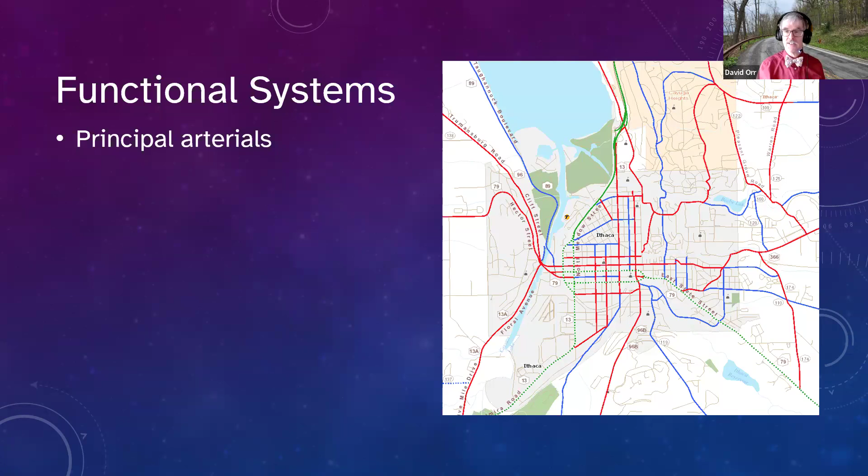So there are principal arterials. These are the main, most important roadways. The interstate system obviously is principal arterials, but every community has certain roads that are the most critical roadways. These are the main lifeblood of the commerce within our community. There'll be minor arterials, maybe not as critical, but they'll still be pretty important to getting people from point A to point B. And the primary focus on most arterials is movement. Movement and safety, those are the primary two things.

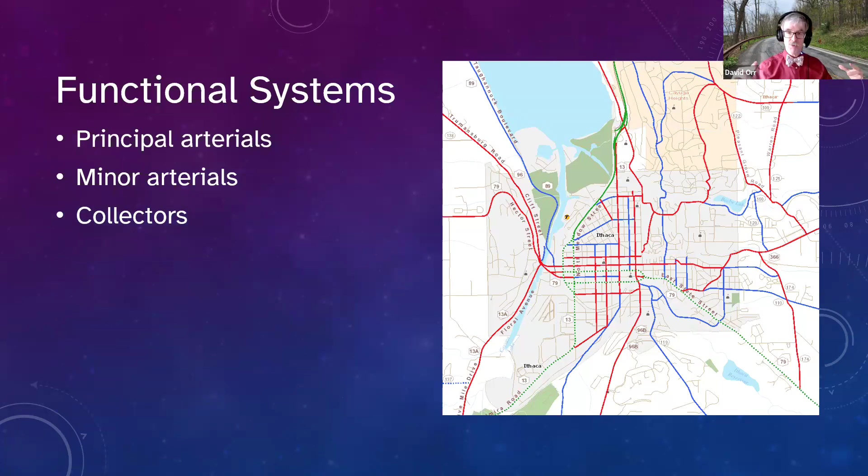And there can be a conflict because the second tier of roads, where we collect the traffic from the local system, sometimes almost acts like an arterial. And of course, the local roads is where we live and work and go to school. There definitely can be a conflict where we've got a road that's trying to serve multiple functions at the same time, because while the arterial's primary job is movement, the local's primary job is access. And speeds typically are lower and volumes are typically lower, but when you get a high volume local road that acts like an arterial, it can create a conflict.

I mean, we like to joke and say that everybody starts and finishes every trip, and it's not really a joke, it's true. They start and end a trip on a local road. Where they live is a local road, even if it's classified as an arterial or a collector. If people could do so, they would put a driveway on the thruway. And then they'd complain, of course, the next day because people were speeding in front of their house. But that's a reality we have to deal with.

Now, if you're interested in knowing what the classification is for your system, you can go online and just type in functional classification, New York State DOT, and up will pop the New York State DOT functional classification viewer, and you can actually get a sense of what the federal and state governments are classifying the roads for. And by the way, there's some funding that's available for the arterials and collectors.

Now, you could also look at very low volume road functional classifications. In this particular case, this is a standard that is now actually supported by AASHTO. And for low volume, under 400, some people say under 2,000, we'll argue about that particular number. But the idea is you use land classification to decide the purpose of the roadway. So is it residential? Is it commercial? Is it agricultural? And that can be very helpful when it comes to trying to figure out your priorities and where you're going to spend your money.

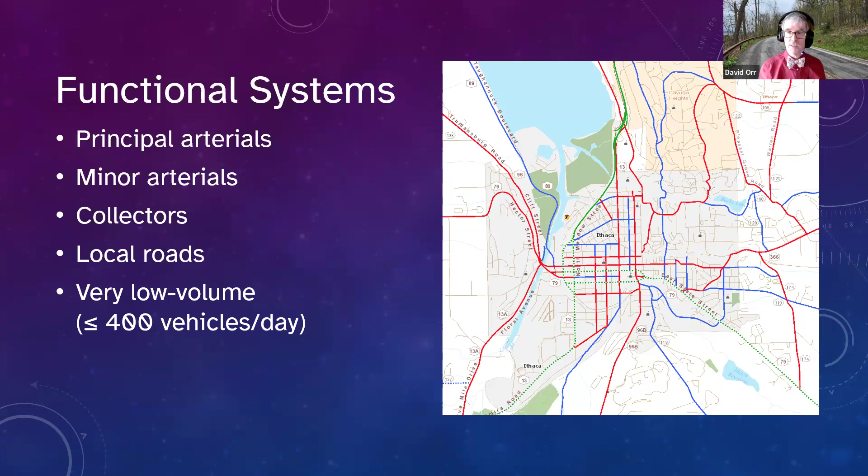Now, one of the more critical things we need to know is traffic. And traffic volume, you can put out counters and tubes, and they have ones that are visual these days. All kind of fancy ways to estimate traffic. But I got a couple of rules that actually work pretty well and can be used to check to make sure your tools are working right.

So let's look at a rural area. The busiest time of day typically is everybody going to work in the morning or everybody coming home from school and work in the afternoon. And it might be different in your community. More commonly, it's in the afternoon because everybody wants to get home from work. But in a lot of communities, it can be in the morning because everybody's due at a particular plant or all the government offices open at a certain time. You probably know when that is in your area.

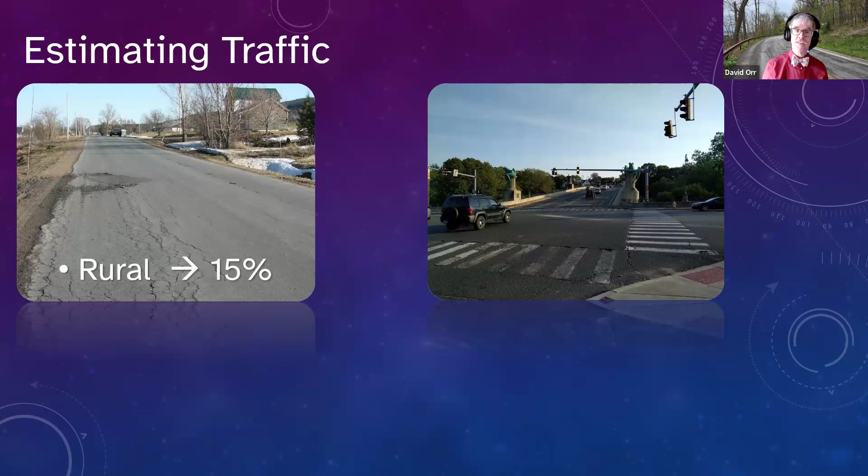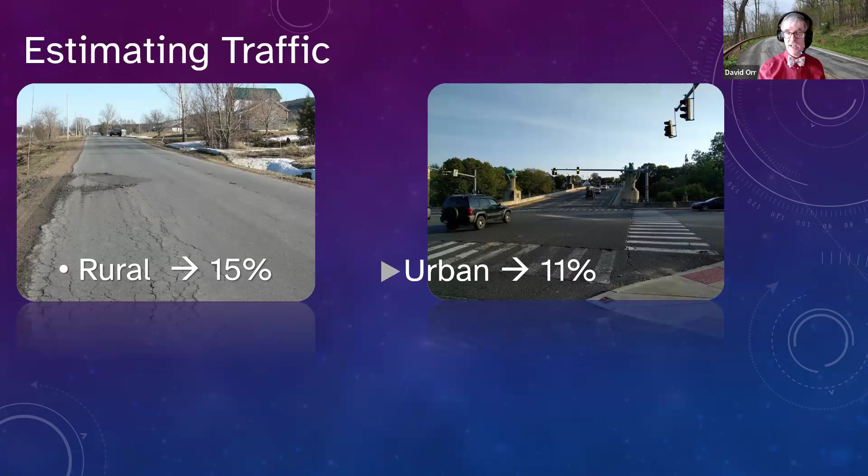During that busiest hour of the day, in a rural area, you're going to get about 15% of the traffic. In an urban area, it's about 11% of the traffic. So a little bit less. There's not as much of a peak with the morning and afternoon commutes, surprisingly. But if you want to know traffic then, you could go out for 15 minutes, multiply that value by 4 to get an hour count, and divide it by that percentage. And that would give you an estimate of the traffic.

You could also figure out a factor, an F factor if you wanted to, and again, rounded, you could take the count for 15 minutes and multiply it by 27. That gives you your rural count. You could take the count in an urban area and multiply it by 36. That would give you your urban count. What does this mean practically?

Well, in a rural area, if you think about it, if you had one vehicle per minute, that would be about 400 vehicles per day, which is that cutoff point we talked about that a lot of people think of as very low volume. So 400 vehicles a day. In an urban area, it of course would be a little bit larger, okay? So if you had one vehicle a minute, you'd have about 600 vehicles a day. And of course, in suburban areas, it's going to be between the two.

Surprisingly, this is pretty accurate, within 5 or 10%. And if you put out a counter and you see a really low number or a really large number compared to what your 15-minute count tells you, maybe something's wrong with the tubes or the counter. And it's a quick way to check before you spend the money and the time on the fancy tools. And it's a good way to estimate traffic.

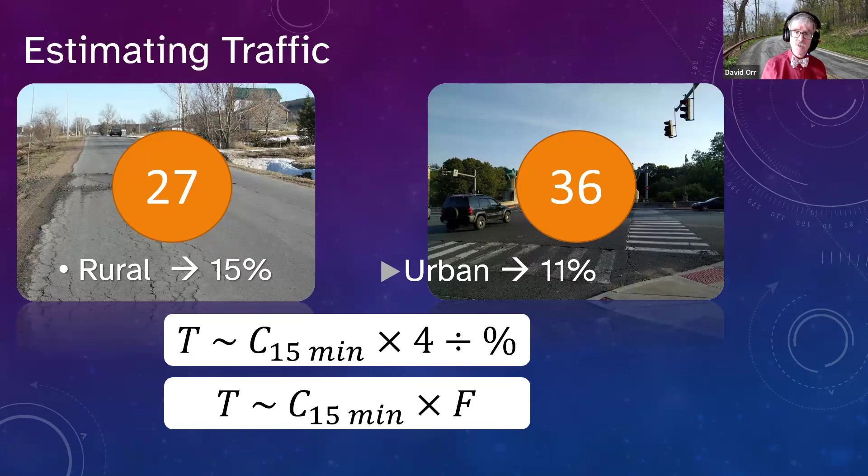Now, in terms of what this means practically is, our functional classifications, those arterials take more traffic volume, even though they're a relatively small portion of our overall network. Okay? So look at the principal arterials. These are the interstates, the national highway system. It, depending on the state, can be from 40 to 65% of the total traffic volume. It's only 5 to 10% of the length. And especially in rural areas, the traffic volumes are much higher on the arterials compared to the lengths.

And again, in the local system, it may only carry 10 to 30% of the traffic volume, but in terms of centerline mileage, it's 65 to 80%. And when we're trying to manage that, trying to budget for that, that can be a bit of a challenge for us because obviously, everything gets paid for directly or indirectly with taxes, and there's just a limited amount of funds.

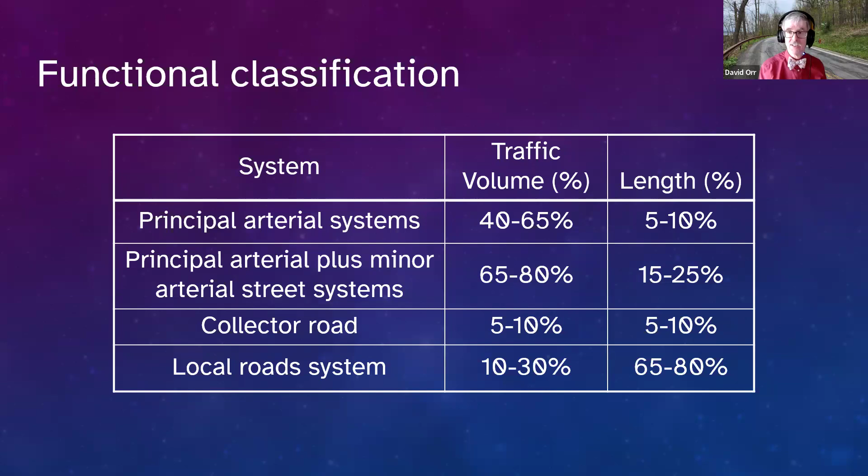Now, in terms of goods transported by truck, the percentage has varied some from one year to the next, but on average, it's about 70% of all goods are on a truck at some point during their delivery cycle. They may be brought in by ship to the United States, they may be sent by pipeline, but at some point the gasoline is put into a truck and taken to the gas station. The microwave that was shipped overseas is put on a train, but then put on a truck to be dropped off at the local Walmart or Kmart or store that you're going to buy it from. So the idea is most goods transported by truck.

One thing you may want to do, especially if you work on the government side, is go back and look at those classifications. They haven't been updated in a lot of cases, and maybe it's time to think about that. If you've got a road that really is acting more like an arterial, you might want to get it on the list, and vice versa. You may have a road that's really more local. It does change funding, both for good and for bad. You really want to have it in the right spot because if you're not a federal aid road, you may not be eligible for certain kinds of emergency relief, for instance. So something to keep in mind.

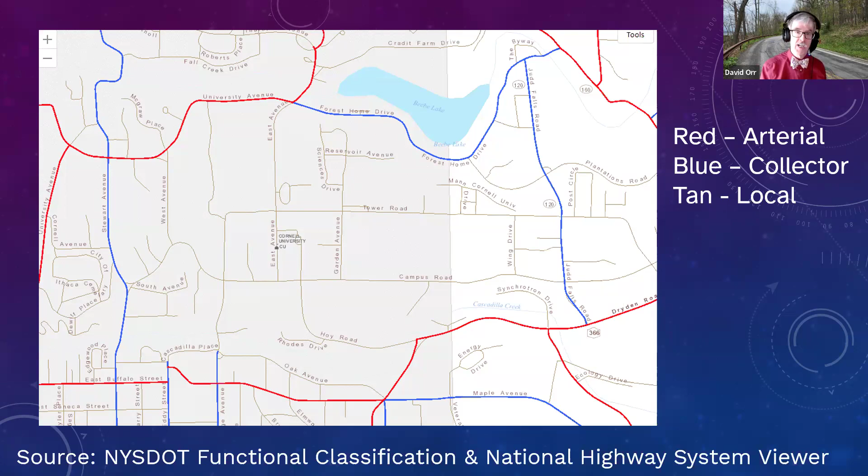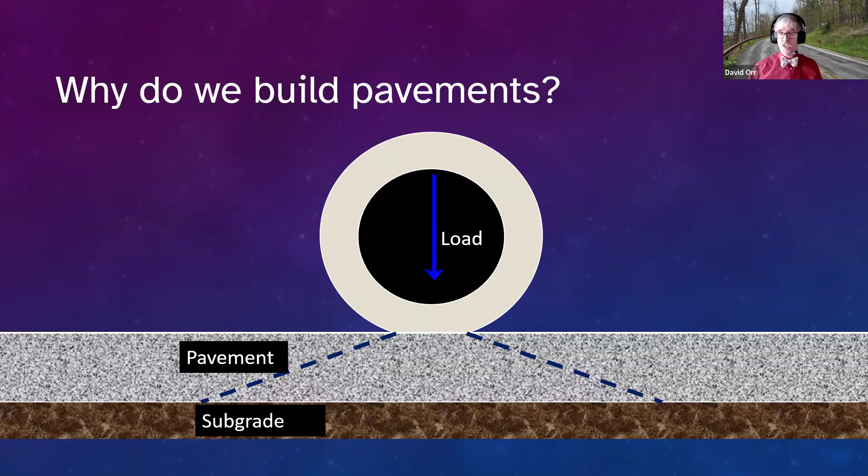But if you got a road that does this to you, you probably got a base problem or you've got a problem with water. So think about that when you're trying to think about making sure your road has enough thickness, has enough structure. And think about the critical locations on the pavement, okay? You're going to have critical places where there's going to be damage right underneath the wheel due to cracking, due to the fact that there is the high pressure tire causing cracking going on.

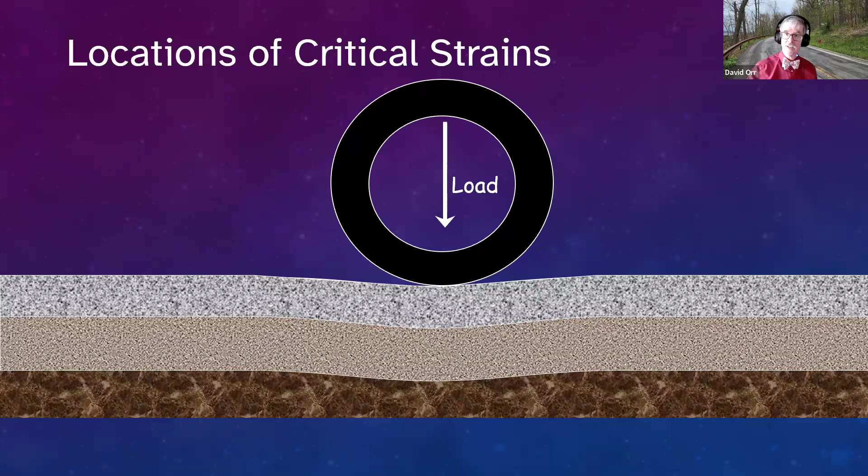You're also going to have a more critical problem on the top of the subgrade. You don't want to overstress the subgrade. That's going to lead to rutting, and rutting is bad as well. So keep that in mind. And we can do, and we have done, whole webinars and classes on designing the pavement, but build the road to handle the load. Now, what does this mean in terms of the roadway itself?

Well, what I'm really caring about is the damage of a truck versus the damage of a car. A truck weighs about 10 times more than a car, a fully loaded dump truck, but it doesn't just do 10 times more the damage. It does about 4,000 to 6,000 times the damage. If I had a fully loaded dump truck and I had a whole bunch of cars, it would take about 4,000 passes of the cars to equal one pass of a truck.

And especially if you got a fairly low volume of traffic, you got a pretty high percentage of trucks. So the thickness of your road, you're driving it by the number of trucks. Okay? In terms of geometry, which we'll talk about in a little bit, that's usually driven by radius for trucks, but the number of cars and how the cars are getting around. So we have to balance these two things. And of course, at the wrong time of year, even a few truck passes can do even more damage if the roadway's in thawing conditions and it's weak.

Now, I'm not talking about something like this where you've got a single supersized load that is putting a lot of weight onto a roadway. Something like this is the digester in Iowa. You're going to have to design this particular one very specifically, okay? That's a one-off. Normally, we try to build the road to handle the loads, and we have certain minimums that we might want to put in.

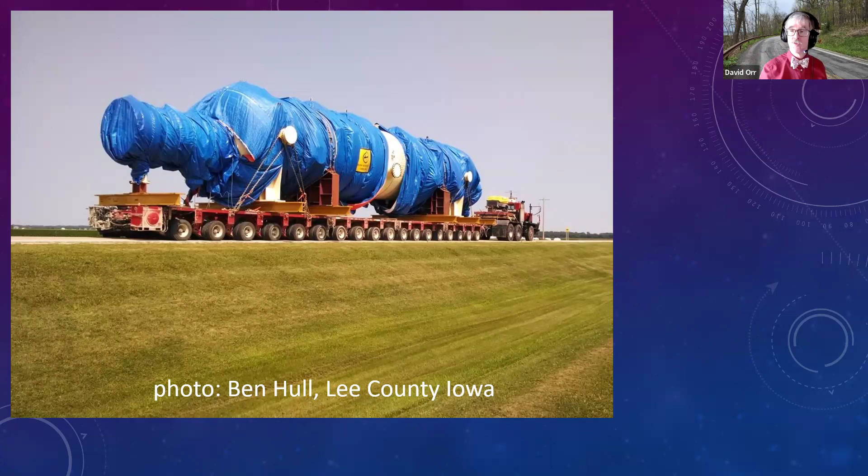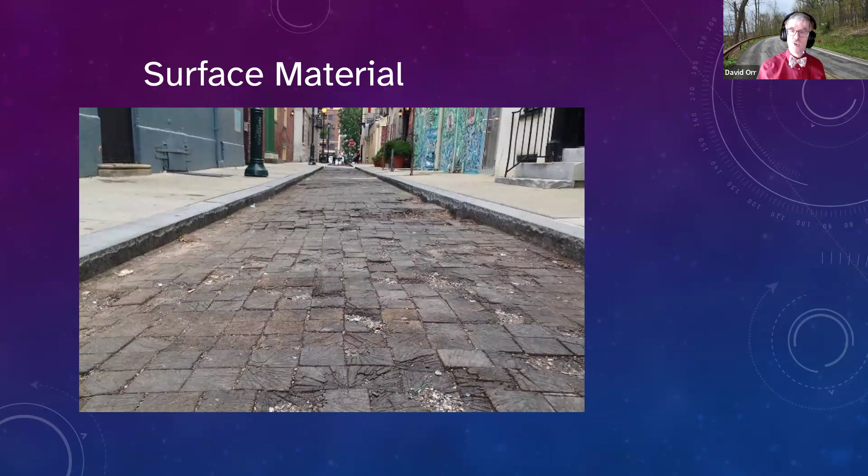And as part of that, we care about the surface material that we have for the roadway. Now, this happens to be a wooden street in Philadelphia, okay? It's actually wood blocks that have been placed and put in place and chinked in Philadelphia. But what other surface materials do we actually use on our roadway? What kind of surface materials? Let's see what y'all come up with. Concrete surfaces, brick. I got someone put stone over onto the left. Mm-hmm. Asphalt, gravel, cobbles. Yeah.

Surprisingly, across the entire United States, gravel is still the most common surface type. Okay. In fact, we're actually depaving some roadways. We're taking them from asphalt back to gravel. Second by far is asphalt. Some people call that blacktop. Some people call that bituminous pavement.

Different words are used, but essentially, what is the binding agent? What holds the materials together on the surface? Is it going to be concrete, asphalt, or the material itself, the gravel material itself, the clays and the fines and stuff like that? You can use warm mix, you can use cold mix. There's still hot mix being sold, though most of our asphalts these days are warm mixes and cold mixes. But think about the different surfaces that you've got on there.

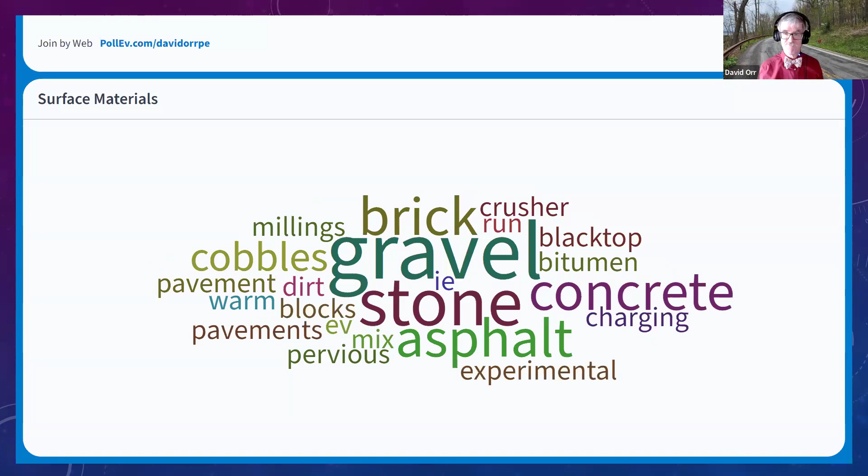But if you're going to do that, if you're going to take it from a gravel surface to a gravel base by putting a chip seal on it or covering it with asphalt or even concrete, you got to make sure the base is clean enough. If you don't do that, you're going to have a problem because water that used to evaporate now actually builds up pressure and can blow your roadway apart. So think a lot before you just pave over a gravel road.

And oh, by the way, if you wanted to depave and take a road back to gravel, you can't just take the asphalt off because now if that had good gravel for being underneath the asphalt, it doesn't have enough fines and it wears away. So these are all things you need to think about for the basics of what makes up a good road.

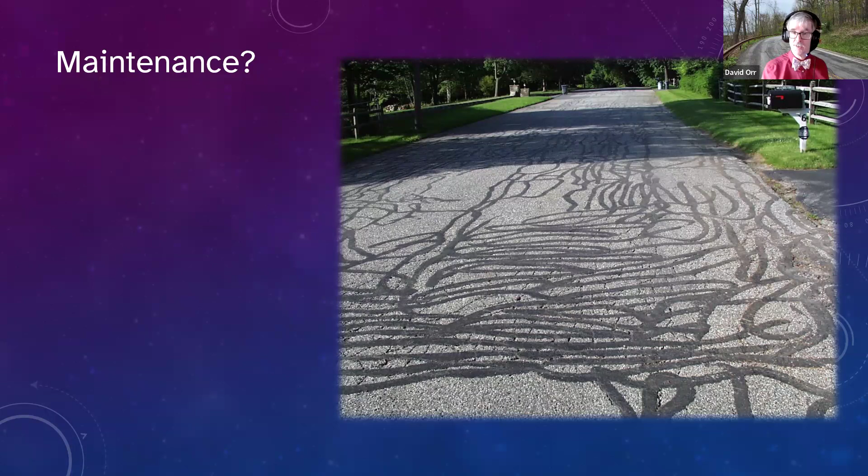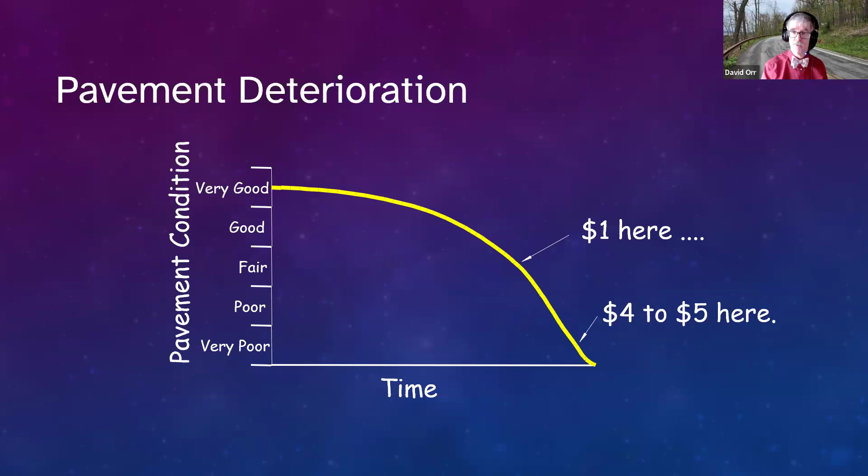So again, the concept behind any pavement design and maintenance is keep good roads in good shape, and maintenance is always cheaper. It's the same thing with our car, the same thing with our house, and yet we all get easily lulled into the idea that I can get to it later. I can push maintenance off. Please don't do that. That's going to help your roads and help use the tax dollars as wisely as possible.

Now let's talk a little bit about the geometry of the roadway. Okay? Now, roadway geometry is driven obviously by traffic, but what does the public need? Okay? Now, I'm going to give you three choices for your road width, and I'm going to ask you to think about which one, if you could only pick one, which one would you choose? Would you like a 10-foot wide road? Would you like a 22-foot wide road? Or would you like a 36-foot wide road?

Okay? Now we're going to vote. If you could only pick one, which one are you going to vote for? Let's see what we come up with.

So about 80% of you have voted for 22 feet. If you can only pick one, you're going to do 22 feet. About 20% of you have voted for the wider road. Okay? None of you voted for 10, though I did see a couple people start there, but that's okay.

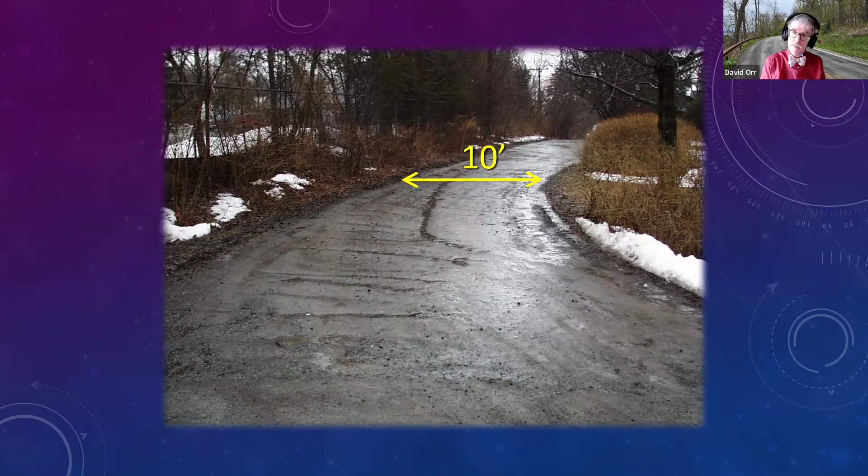Here's the reality, and this is actually something I've seen a little bit too often. We really need to have a variety of choices of widths. It might even be changing as little as just a few feet, because you really want to change the width to handle the situation. You know, if it's just a gravel road that serves just a few houses and there's nice connectivity and it's not being used by emergency management other than in a pinch and maybe the garbage truck, 10 or 12 feet might be more than adequate. Even though it's really almost one lane, people can sneak around each other at a slow speed.

You start getting into higher speeds, maybe collectors, you're probably going to need at least an 11-foot lane. That's 22 feet. Now, that doesn't count your shoulders. You might want wider shoulders in certain situations, but 22 feet. But again, there are maybe roads where 20 is adequate. You need 24. And finally, if you're allowing parking, if you've got buses, if you want to put in a bike lane, you're absolutely going to need the wider width that's available.

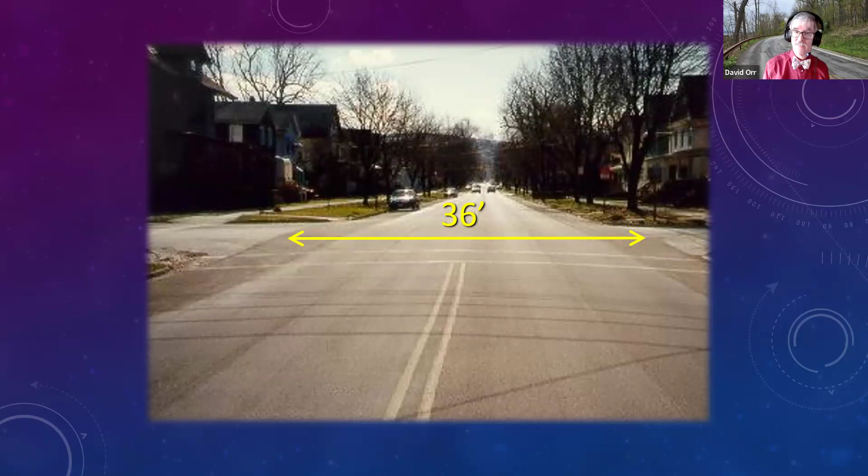In fact, if you come to visit Ithaca, you'll notice as you get into the city center, roads get a little tight because when the city was laid out by Simeon DeWitt, he decided he wanted to restrict and sell more land, so those roads are a little bit tight, and it's a tough challenge for the city to have to deal with that.

So in terms of what does the public need? Well, what the public really needs is a good set of plans, a good set of standards. And one of the links in the handout that's available is a link to some standards that we put up on our website that you can use as a starting point. And then you should modify them for your own conditions. We really want a variety of choices.

Now, we said safety was our primary reason in a lot of cases for what we're doing on a particular roadway. And so in this case, we want to think about stopping sight distance. Stopping sight distance has two components to it. It has the perception reaction distance, i.e., how long does it take you to put your foot on the brake? Gotta make sure you hit the brake. And then how long does it take for the vehicle to actually stop? So there's a distance if you're going down the road before you actually put your foot down. Most people, that reaction time is about 1 to 1.5 seconds.

Now, there are people who are much faster. The really, really good ones with super fast reaction times play sports like baseball and NASCAR because they have incredibly fast reaction times. But most of us, 1 to 1.5 seconds, if we don't know something's happening. So we can help improve the reaction time by good signage. We can help the reaction time by having consistent, good geometry.

But usually our design time is 2.5 seconds. And the reason we design for 2.5, even though most people are a little faster than that, is we're trying to include about 85% or the majority of people. Because as people get older, they tend to have slower reaction times. Or younger drivers have incredibly fast reaction times, but they don't recognize the issue and put their foot on the brake for a longer period of time as well. So 2.5 tends to be a pretty good conservative value for how long it takes to actually put your foot down on the brake, and then you have to actually stop the car. So the stopping sight distances will vary quite a bit.

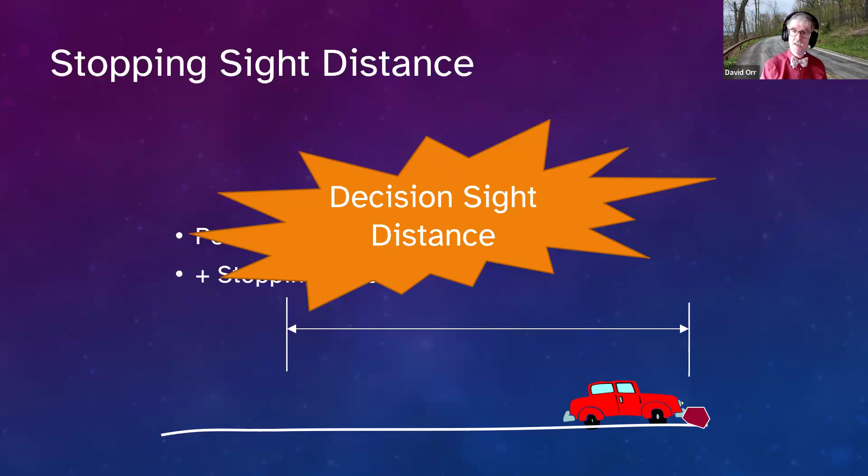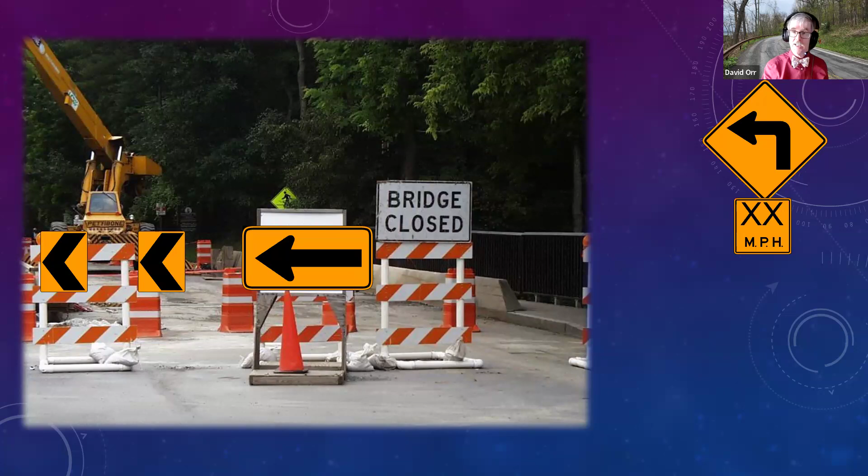Now, in terms of our horizontal alignments, remember, we're moving vehicles around, and at intersections, we have to worry about turning radius and getting around the corners. And you may see things like a mini roundabout. They can be effective, but think about all the vehicles that are getting through there. If it's all cars, that's one thing. But what if there's trucks? Can you get the fire truck through there? Is there commerce? If there's commerce, you may want to think about a different radius or a different design.

I'm not opposed to these things. I think they have their place. But again, think about all the users. And by the way, in an urban area, you also have to think about the bicyclists, the pedestrians, people with the grocery carts, people who are walking their strollers. Keep everybody in mind.

In a more rural area, we actually want to superelevate the curve. So it actually allows us to go around the curve a little bit faster, a little bit safer. We want to transition properly into those curves so that people have good control. And we want to make sure it's not too steep, especially in the winter when we get snow.

And I think we'll get snow eventually. I'm hopeful. But I actually am one of these guys who likes snow. I know. Weird that I am.

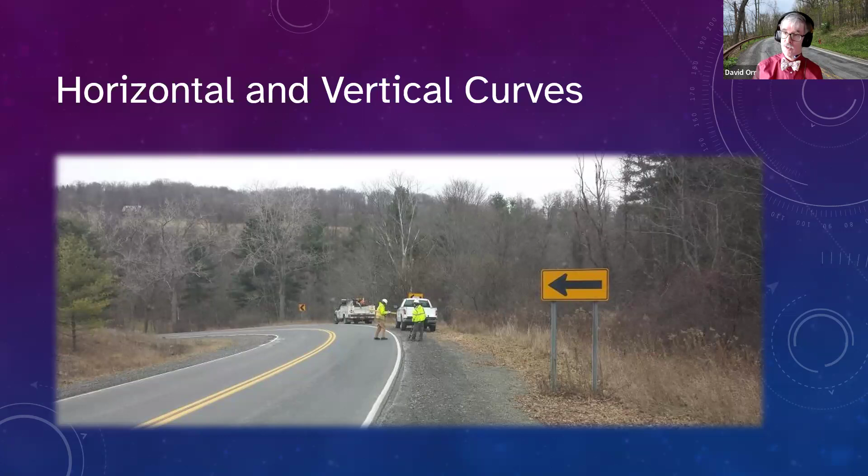Okay. So everybody get ready to raise your hand. You're driving down this roadway and your tire blows out and you're going to lose control. You have a chance to pull off to one side or the other. Raise your hand if you're going to pull off to the right. Okay. I'll give you a sec. Obviously, in a real situation, you would have literally just a second or two.

Okay, so now I'm going to magically lower everybody's hands. I got 10 of you who raised them. Now I want everybody who would have gone to the left, raise your hand. We got slightly more going to the left. And as is the American way, not everybody voted. By the way, sounds like a great idea to swing to the left.

But Jeff Scott took this picture. And when you blow it up and you look carefully, you'll notice that on the left side, there's a small problem. There's some tree stumps. They're a little hidden in the grass. And I've seen cases where the grass actually completely hid the stumps. And you may not find that stump until you hit it. This is a deadly fixed object.

You hit this with any speed, and I mean any speed, your chances of a serious or fatal crash go way too high. So if you're taking down trees, make sure you get them flush with the ground. Anything more than 4 inches above the surface can snag a vehicle and create problems. So take those trees all the way down. In some respects, a tree stump is actually more dangerous than a tree itself. Both can be risky, but think about protecting it. Think about having a nice, consistent clear zone.

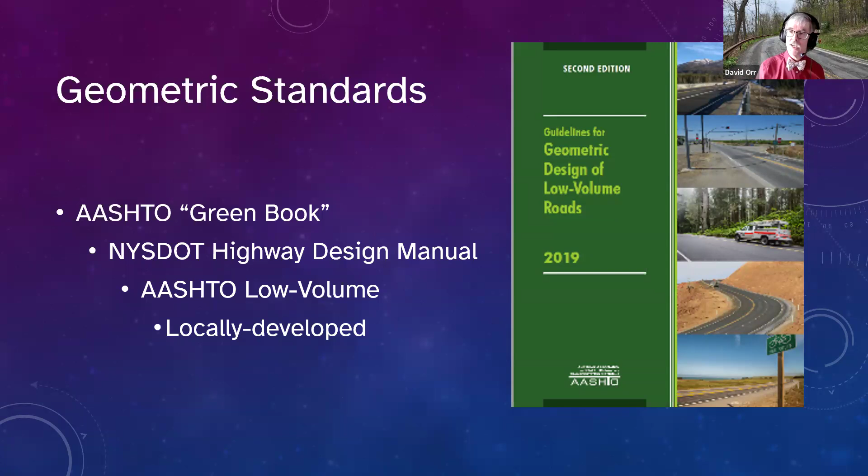Okay? So let's take our last 15 minutes together. We'll obviously do our little PDH questions at the end, but let's talk about the 10 commandments for good roads. Okay? Now, we could argue about the top 10 list. I've done this in a drop-down top 10 from 10 to 1. I've done this as just 10 starting at the top, which we're going to do today. The key is there's certain things we need to think about that make a good roadway, okay? So I'm going to ask you for each of these to throw in some samples to me in the Q&A. So get your Q&A buttons ready to go.

Interestingly enough, I'm not opposed to water. In fact, I want some water. I don't want to get rid of all the water. I really probably should say get the excess water away from the roadway, because you actually need some water when it comes to compaction. You need some water to help hold it together. But yeah, too much water reduces the strength.

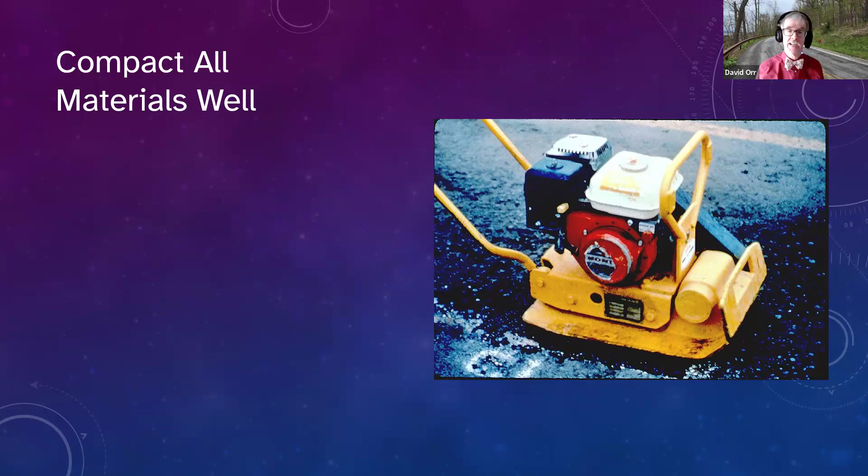We haven't seen much winter. Last winter wasn't that great. This winter, we don't know yet. We haven't seen any snow, at least down by us. But like it or not, winter maintenance is going to drive a lot of our activities. It's going to drive our crew sizes. It's going to drive what we have to think about for plowing and getting rid of snow. And we will get snow events.

So raise your hand if you think, let me lower your hands first. Hang on, let me lower your hands. How many of you think you have enough plows right now to handle this winter? Raise your hand if you have enough plows to handle this winter. Well, that's good. That's good. That's going to drive a lot of what you do. Okay? And that's one of the reasons why there's the big concerns about some of the electric vehicle stuff, because if you're thinking about winter maintenance, you need to have equipment that can handle and be ready for the winter.

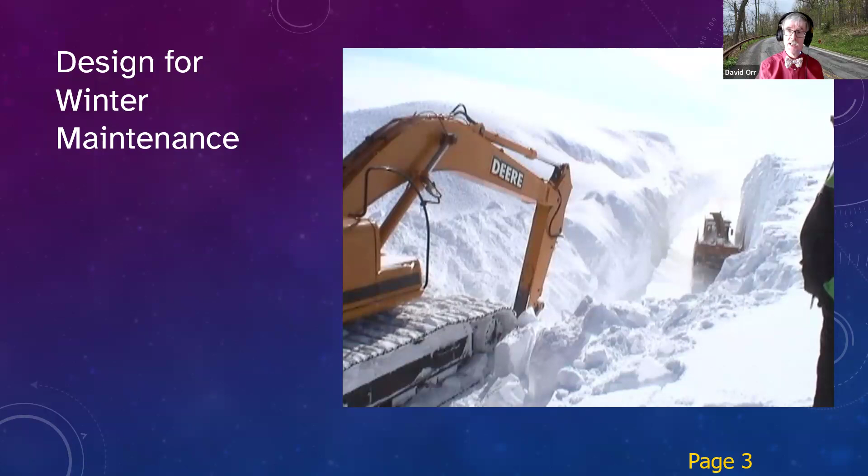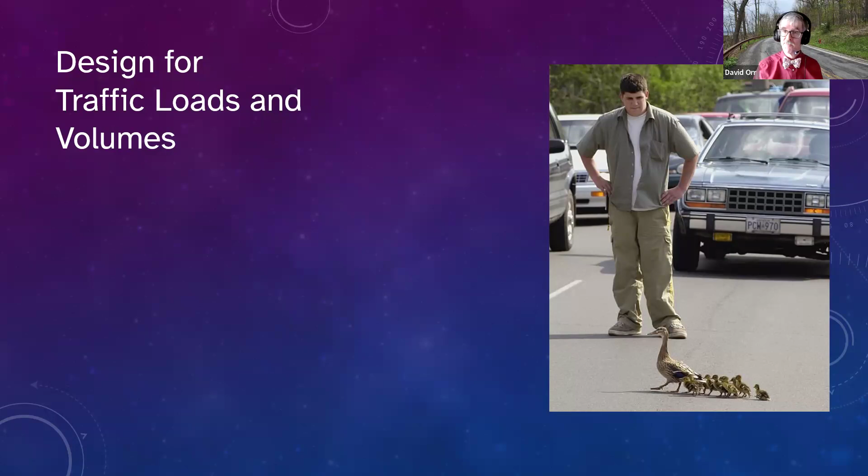Okay? And when you're designing your roads, your geometry and your thickness, design for the traffic loads and the volumes. As I said earlier, build the roads to handle the loads. Okay? Now, obviously, this is very low in terms of traffic loading, but in terms of volume, at least for one creature, there's real importance to be able to get across this road safely, and we have somebody doing their good deed for the day. Okay? Helping the ducks get across the road.

But more commonly, we have thin roads where we just don't have enough thickness. So you could do posting, and we're okay with posting the roads, but you probably want to think about doing only seasonal posting. Post it when you really need to post it. Don't try to leave it up year round. You can't stop local traffic anyway. And long term, we need to build the roads for the vehicles who are using the roads, whether it's farm vehicles, trucks, school buses, cars. Okay?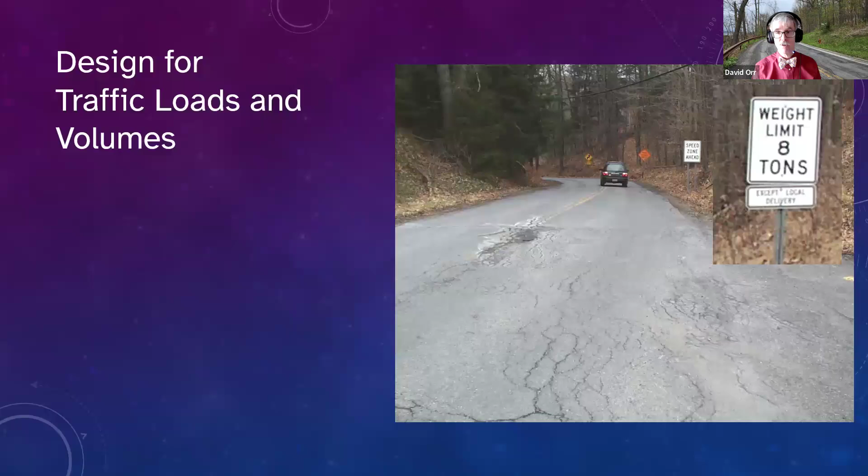8 tons, not going to get a lot of vehicles down that. But again, you're still going to get that local traffic. You're still going to get that local delivery. Okay? Pave the roads only when they are ready. Okay? This particular road was paved the day after I took the photograph. It's not a good candidate for crack repairs. There's water still coming out into the roadway. Make sure you've taken care of the drainage. Make sure you're ready to do the work. Okay?

Don't pave too early. Don't pave too late. Watch the weather. When you put down a chip seal, you need a month or two to really get it to cure out, get all the water out of it. That's why we typically like to stop by Labor Day. Yes, this year it's been warm for longer, so we're going to get away with it. But what happens if we get an early cold snap? And in the spring, we like to get out there early, but make sure the ground has warmed up.

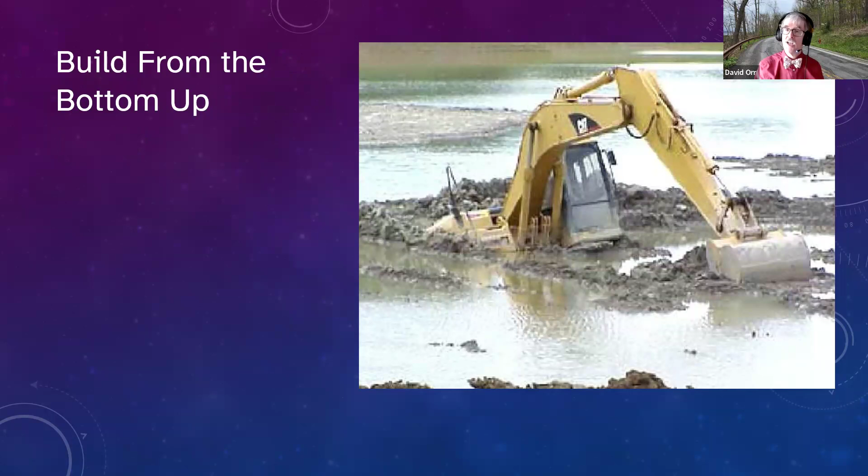Not just the air temperature, but the ground's temperature is ready. Make sure you're ready to pave. Seasonality matters. Make sure the base is in good shape. Spend the time and the effort and build from the bottom up. Always think about what's underneath and where's the water. And if you do that, you're going to be better off. And keep your maintenance. Protect your investment.

If I had to pick the one thing we should cut last, it would be training. If I had the second thing I would cut last, it would be maintenance. What are the first things we like to cut? Training and maintenance. You need well-trained people, and you need to maintain what you've got. We should really be cutting capital work first, okay?

And keep good records. Good records will help you for liability purposes, of course, and will help you figure out what you actually have underneath the roadway, that you don't miss something. So one last question, then we'll do our PDHs and get you out of here. But let me ask you to raise your hand if you keep a daily log. How many of you keep a daily log?

If you are working in the government sector, I absolutely recommend keeping a daily log. Okay? By the way, that daily log, if you truly just keep it for yourself, do not use it to do orders to send to people. You can hold that from a FOIL request. Once you use it for giving orders, however, it's foilable. So keep that in mind. It's a personal log. But you could use it in court. Of course, once it's brought out in court, then the whole thing is foilable. So keep that in mind as well.

So you could keep weather and certain other things in daily records. But have records. Because somebody asked you what you had for lunch a year ago. Do you really know? What was the weather a year ago? You could look it up, but if you've written it down, you have a more specific forecast. You know who was on the crew, and it can help you a lot.

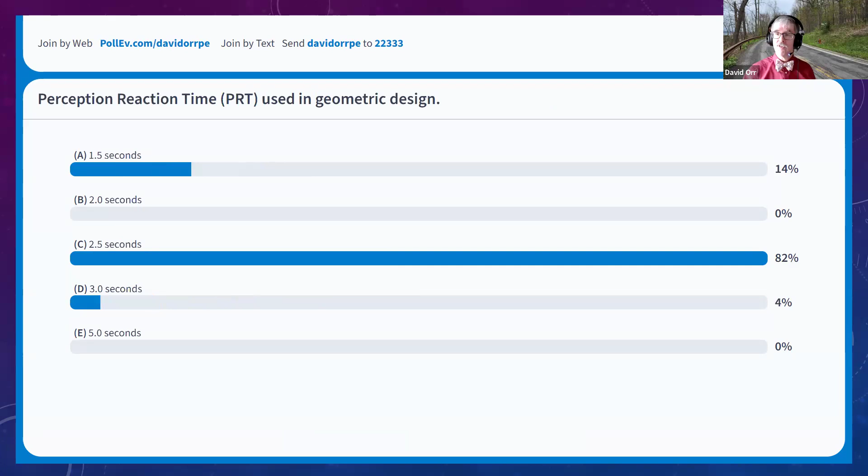And what is the perception reaction time that we need to use to deal with making sure people are safe? Most of us react in the 1.5 seconds, but for design, you're right. We need to think about 2.5 seconds. Again, to be a little conservative, because at the end of the day, we all want to get home safely every single day. Okay? We want good roads. Good road can be gravel, it can be paved, it can be brick, it can be wood, but a good road really helps. So remember why we build the roadways, and everybody will be better off.